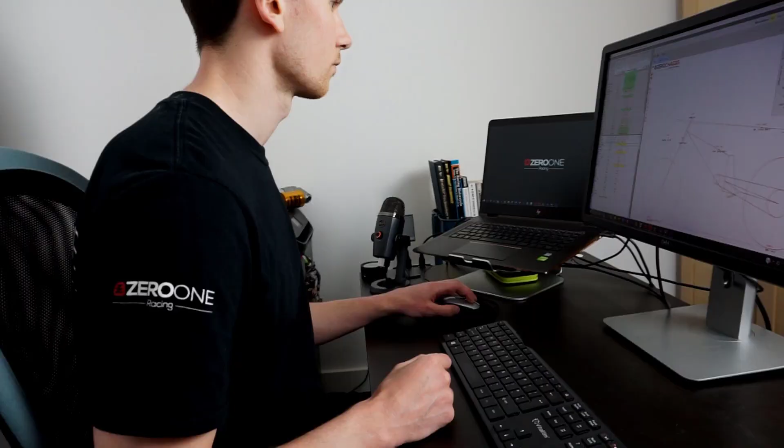Right, wheelbase. The wheelbase plays a major role in the characteristic of a motorcycle. It affects how tightly a bike wants to turn through a corner, how the bike is going to pitch, and also just affects the overall stability and agility of the bike. My name's Aaron from Zero One Racing, and in this video we're going to be looking at wheelbase, what it is, the effect it has on the bike, and why, when adjusting it for racing, there may be more to it than you think. So let's start by looking at what the term wheelbase actually refers to.

Wheelbase is the horizontal measurement from the front wheel contact point to the rear wheel contact point. So when compared with something like trail, the measurement itself is actually quite simple. But what effect does it have on the bike?

Wheelbase plays an important role in the directional stability of a bike. This is the tendency for the bike to want to stay aligned in the direction of travel, so increasing the wheelbase will generally make the bike more directionally stable. Another important factor here is the trail, so this must be considered along with the wheelbase when discussing the stability.

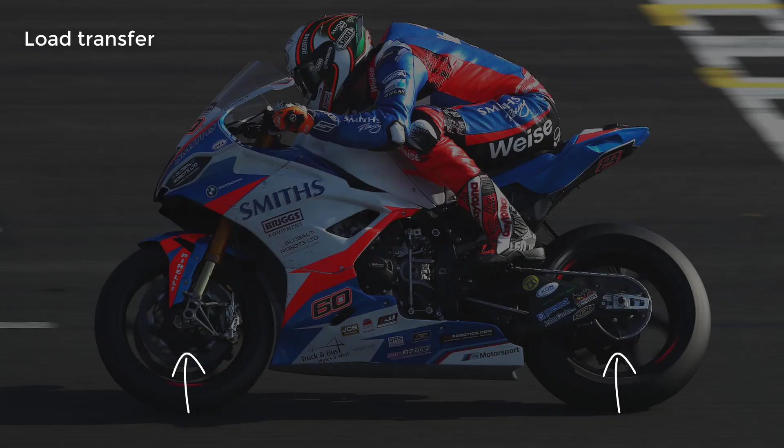The wheelbase also plays a crucial role in how much the bike pitches. This is because when braking or accelerating, load is transferred from one wheel to the other. So when we accelerate, load is transferred to the rear wheel, and when we brake, load is transferred to the front wheel.

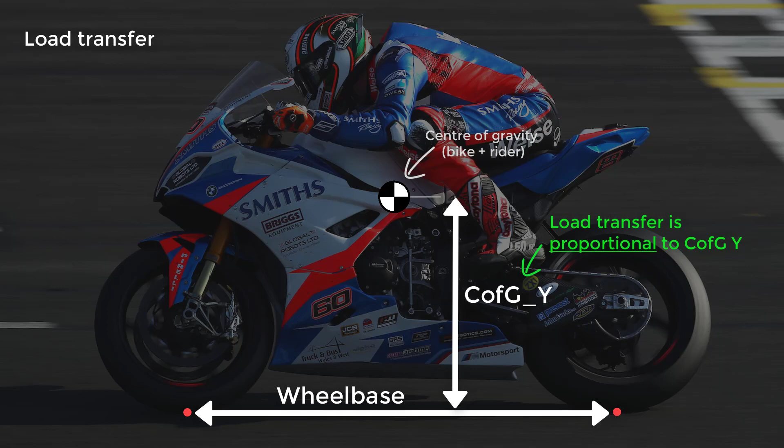The amount of load that's transferred is proportional to our centre of gravity height and inversely proportional to our wheelbase. So the longer our wheelbase is, the less load is transferred during braking and acceleration, and the shorter our wheelbase, the more load is transferred.

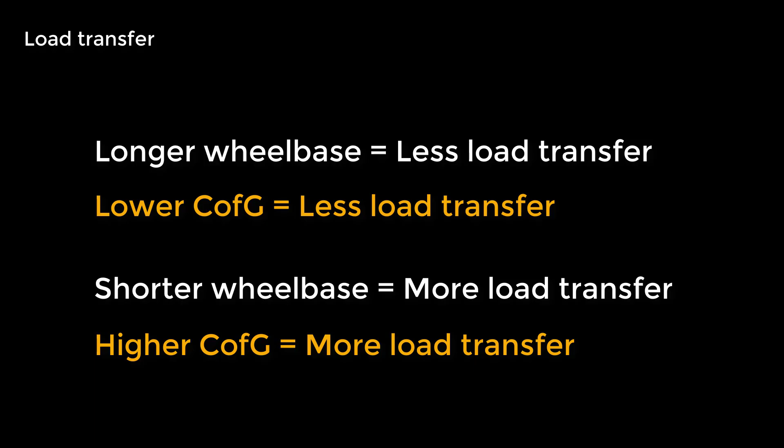The same is true, but the other way around, for centre of gravity height. So a higher centre of gravity will give us more load transfer, and a lower centre of gravity will give us less load transfer. So when analysing how much load transfer there will be, it's important to consider the combined effect of both the wheelbase and the centre of gravity height.

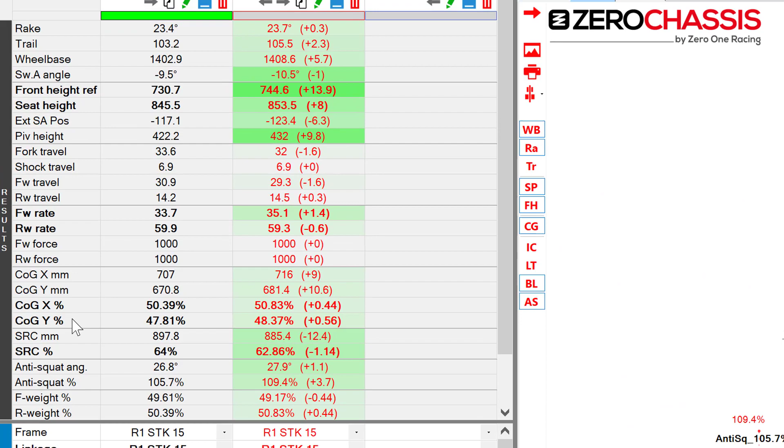In ZeroChassis, this parameter is called the centre of gravity height percentage, because it's the centre of gravity height as a percentage of the wheelbase. So for a bike with a centre of gravity height of 700mm and a wheelbase of 1400mm, the centre of gravity height percentage will be 50%. The higher this value is, the more load transfer the bike will experience for a given braking or accelerating force.

More load transfer to the front during braking will result in the bike pitching more to the front. But during acceleration, it's a bit more complicated as to whether the bike's rear suspension will compress or extend, and this is because it's a result of the anti-squat characteristic of the bike, but we'll look into this more in a different video.

Wheelbase also influences how tight or how wide a line the bike wants to follow around a corner. So a shorter wheelbase will allow the bike to turn tighter for a given steering angle.

The effects that wheelbase have on the bike are a compromise, and the manufacturer will have designed the wheelbase along with the rest of the bike's geometry to give the bike certain handling characteristics, and also to be able to handle the power of the bike and the type of riding that the bike will be subjected to.

So, in racing, when adjusting the wheelbase, things can get a bit complicated. One reason is because to alter the wheelbase we have to make a physical change on the bike, and most of these changes will have major knock-on effects in other areas.

Sometimes these knock-on effects can be even more significant to the bike than the change in wheelbase. So let's start with the most common adjustment to change the wheelbase, which is changing our swing arm length.

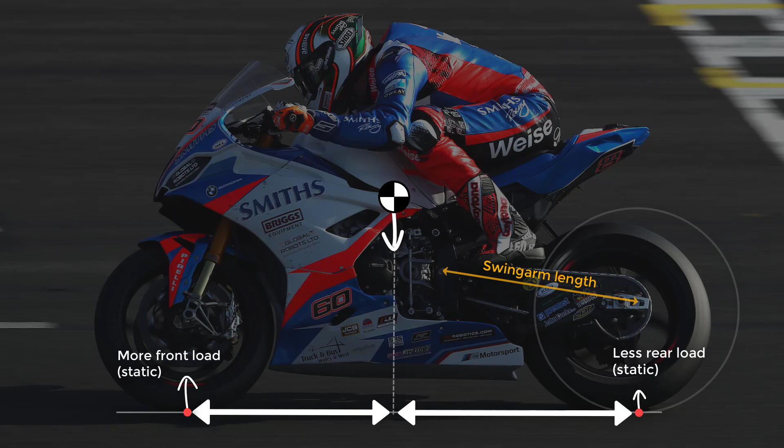Changing the swing arm will also change our link ratio by affecting the amount of leverage that the rear wheel has over the rear shock. So if we make the swing arm longer, there will be more leverage, and therefore the rear wheel rate will be softer, and vice versa with a shorter swing arm.

So if the change to the swing arm length is big enough, it may require the rear suspension to be adjusted to compensate for this.

Also, because we've changed the wheelbase without changing our centre of gravity height, this will affect the amount of load transfer that we have during braking and acceleration. So if you wanted to try a different wheelbase but you want to keep the load transfer the same, make sure to adjust the height of the bike to keep the centre of gravity height percentage the same.

As already mentioned, if you change the swing arm length, then we're going to be changing the weight distribution of the bike. But what we can do to compensate for this will depend on the bike you have and the adjustments you have available.

Some bikes now have adjustable headpipe inserts, which allow us to move the whole front assembly forwards or backwards in the headpipe. So this means if we wanted to change our swing arm length by a certain amount, we could also make the same change but in the opposite direction to the front assembly of the bike, therefore keeping the weight distribution over the wheels the same.

From a practical point of view, changing the swing arm length is also made complicated because you can't just choose any swing arm length you want. You have to adjust in set increments, which are dictated to you by the chain pitch. So for the same front and rear sprocket setup, you'll have to add links to make the swing arm longer and take away links to make the swing arm shorter.

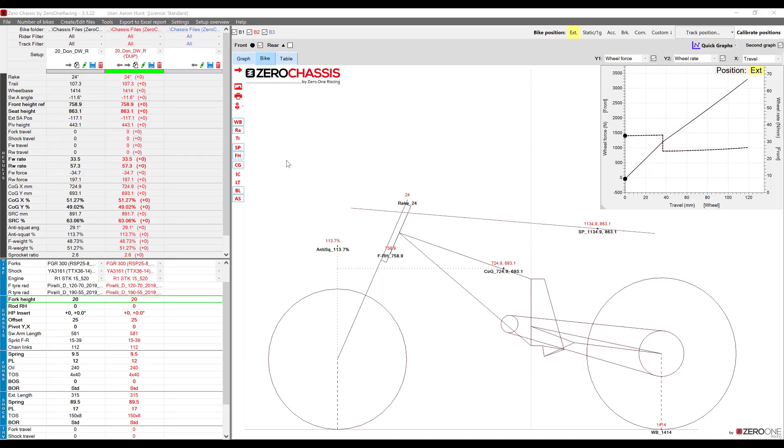Virtually any change to the chassis position will have some effect on the wheelbase. So there are other things that we can adjust to change the wheelbase, but it's always necessary to consider the knock-on effects that these are having.

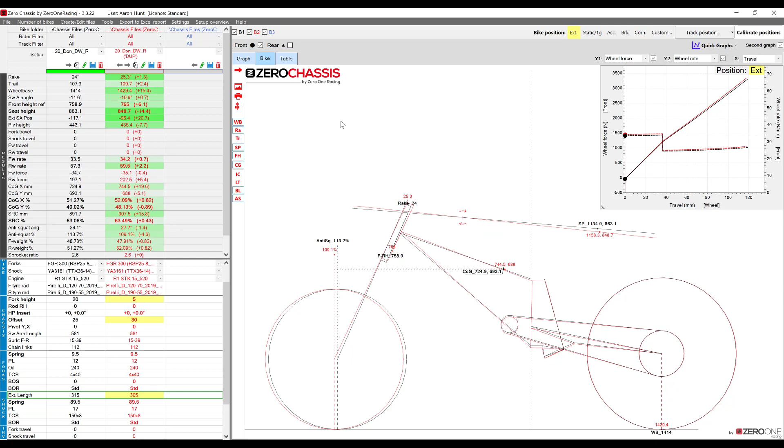This is why it's so useful to use software like ZeroChassis, which will show you these knock-on effects and how significant they are. You can also easily view the different swing arm and gearing options available to you using the built-in gearing calculator.

To briefly sum up, a longer wheelbase will likely give more stability, while a shorter wheelbase will likely give more agility and tighter turning. When adjusting the wheelbase, make sure to consider how the centre of gravity location, both in the X and Y direction, are changing as a percentage of the wheelbase.

So I hope this has helped you to better understand wheelbase.